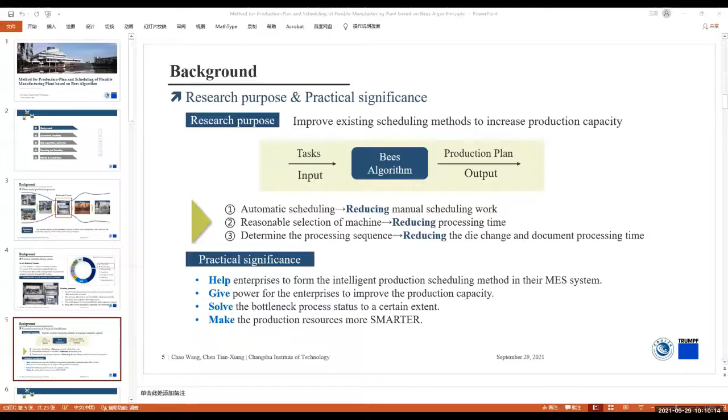Hello everyone, I'm Chao Wang from Changshu Institute of Technology. I'm going to introduce a production plan study with TRUMPF, a famous bending machine manufacturer. This study established a mathematical model based on the real working environment and compares two kinds of bees algorithms. First, I'm going to introduce the background, then the mathematical modeling and the algorithm part. Finally, a short conclusion. This study starts from last December, cooperated with a factory in China.

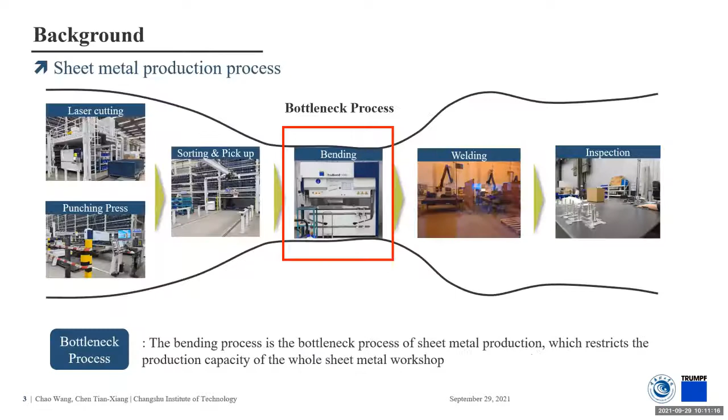As seen from the flow sheet, the bending process plays a vital role in the whole production. It was a bottleneck process and needed to be promoted. The objective of this study was to find an algorithm to help the production plan. Difficulties existed in the mathematical modeling and finding an appropriate algorithm to solve the optimization problem, which has a huge amount of combinations. In the bending process, these flexible manufacturing plants have 4 different bending machines with different series numbers, so they have different capability. The current production plan was assigned manually.

Then they put them into the MES system. So many problems were brought in with this traditional operation procedure. As seen from the moment analysis, processing and die changing occupies more than 60% of the total working time. The file manipulation and the preparing time could also be decreased with appropriate scheduling. The data used in this study comes from real one day's production data, and on that day only 55% of the tasks at one machine were finished.

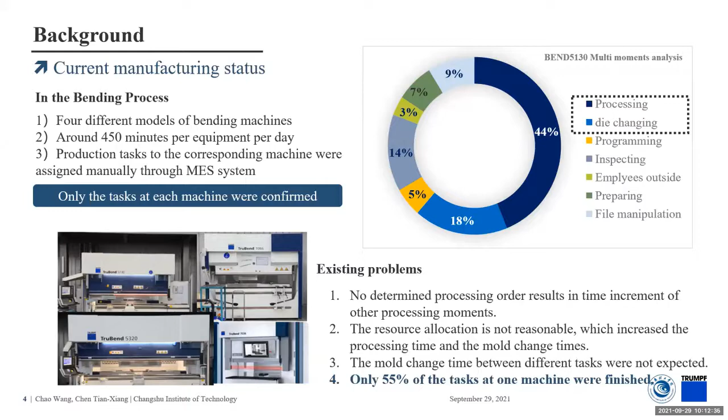In order to increase the production capacity, our purpose was using this algorithm to have a smarter production plan. In the future, we also plan to help flexible manufacturing factories like TRUMPF use this intelligent production scheduling method in their MES system.

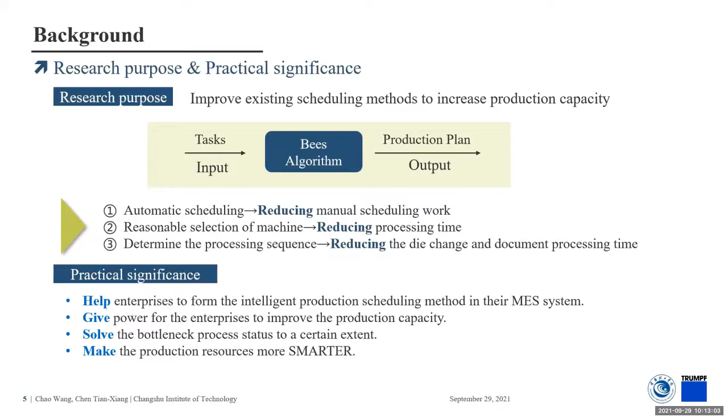In this study, the mathematical modeling was tough to establish. Many conditions were significant enough to be concerned. As the plant has different kinds of machines, a variety of work pieces face a machine selection problem, depending on the machine type, processing time, and the limitation of 450 minutes working time per day. Also, the number of work pieces is less and more varied. They require different dies, including upper die and lower die, and considering the die change time, plenty of time could be saved.

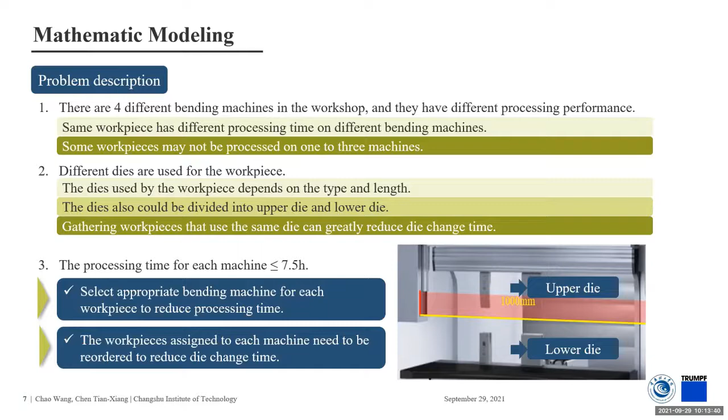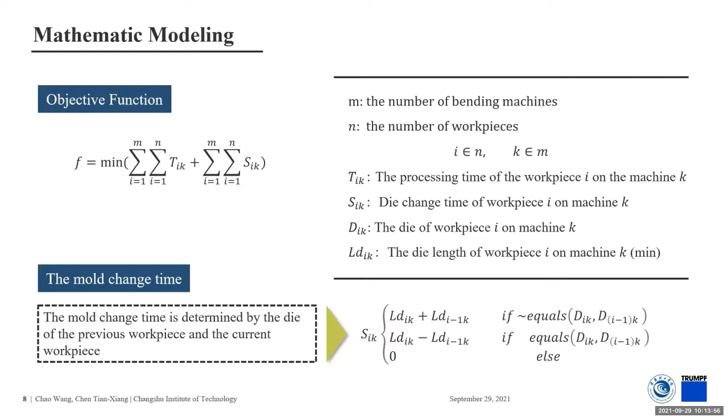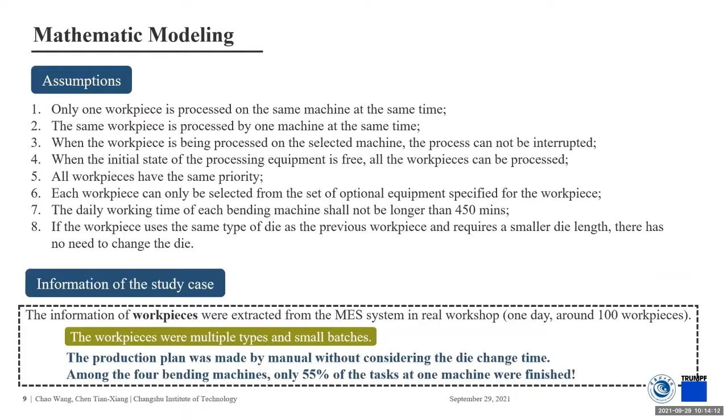As the work pieces were assigned to 4 machines, we focus on the machine with the longest working time, including processing time and die change time. For the die change time, it was determined by the die of the previous and the current work pieces with rules. In the mathematical modeling, many assumptions were made corresponding to the real situation, and you can find more assumptions and their details in the coming chapter.

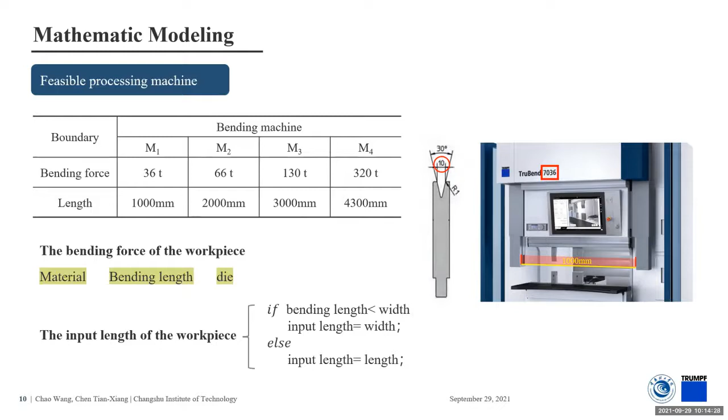Here was the method for work pieces to select the feasible processing machine. It depends on the bending force and the length. The calculation of bending force was the same as the current database of TRUMPF factory.

2 different bees algorithms were performed in this study. The first one comes from the basic bees algorithm. Elite sites and base sites carry out the local searching with different numbers of bees. Due to the large number of combinations, the solution was very unstable.

At there, we also found the number of attempt times for great sites was hard to confirm, as new sites were hard to come inside, as their solutions were worse than the sites after many attempts, although they may have potential faster solutions.

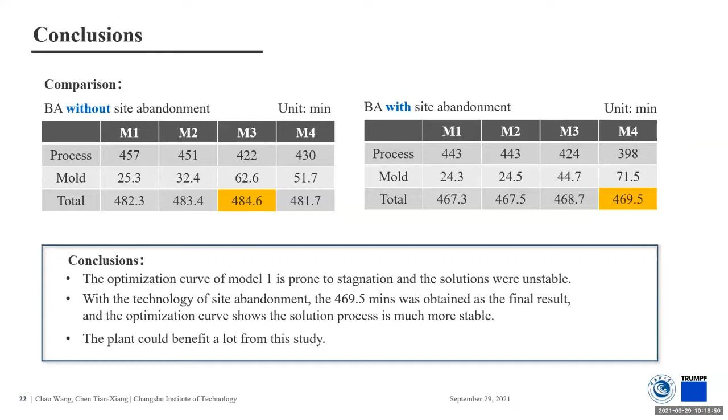469.5 minutes was obtained as a result in this study. This result comes from many boundaries with respect to the real working conditions of the flexible manufacturing plant. The plant could benefit from this study not only through the optimization, but also through the rules we set for the operation sequence and other workers, to help reduce manual work.

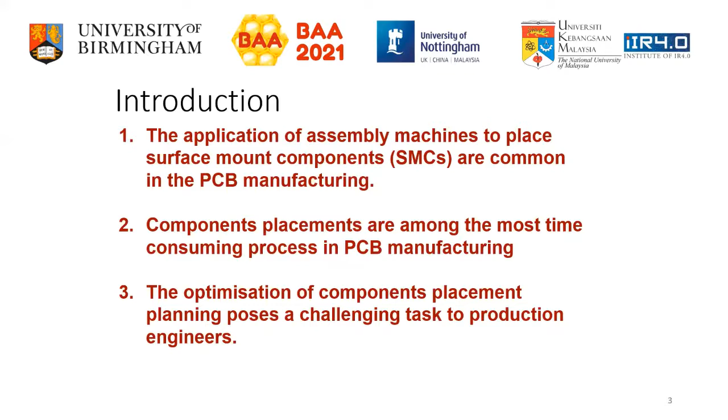In this work, we will focus on PCB assembly systems with MBTD characteristic. PCB assembly system with moving board with time delay, MBTD configuration, is the most complex assembly machine. This is because it requires the synchronization of three mechanisms in the assembly: the feeder system, the multi-head turret pick-and-place system, and the XY assembly table.

During assembly, these mechanisms move at the same time. The synchronization involves complex coordination of the feeder movement from one point to another to provide the correct component for the multi-head turret system, the XY table that moves to the placement position, and the multi-head turret that rotates to a position to pick up a component and place another component at the correct placement position at the same time.

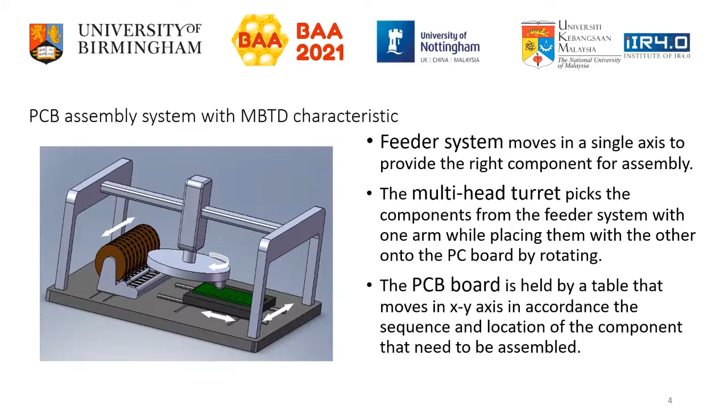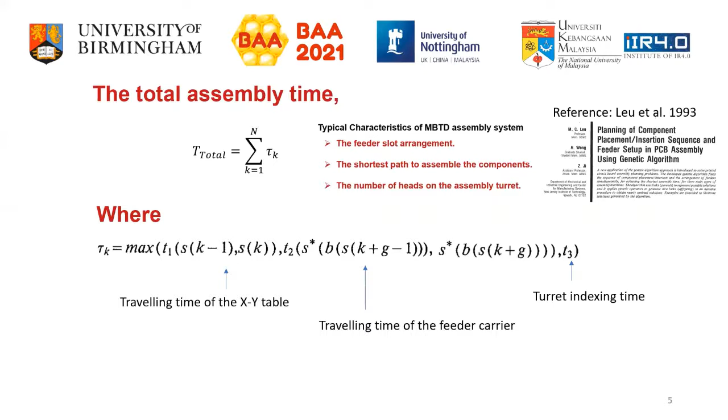The three important times to be considered are the traveling time of the XY table, the traveling time of the feeder carrier, and the turret indexing time. Among the three timings, the longest of the three is the time needed in the assembly of each component. The movement of the two faster parts among the feeder carrier, the XY assembly table, and the turret need to wait until the slowest movement has been completed.

TRIZ is an abbreviation from the Russian language. The translation is the theory of inventive problem solving. It was created by Genrich Altshuller, a Russian engineer who studied inventions from many resources, including patents. He looked for any similarity between different inventions. Altshuller found that there are 40 inventive principles, and most inventions follow at least one of the 40 inventive principles. In other words, these 40 inventive principles can be used to boost our creativity.

We have used only 3 inventive principles from the 40 inventive principles to create the TRIZ-Inspired Operators. Not all 40 inventive principles were used.

There are three inventive principles being used in the TRIZ-Inspired Operators: dynamization, segmentation, and local quality. Dynamization is to allow the characteristics of an object, the external environment, or a process to change to find an optimal operating condition, making it more flexible, movable, or adaptive. Segmentation is about dividing an object into independent parts or groups. Local quality is about making each part of an object fulfill a different or complementary useful function.

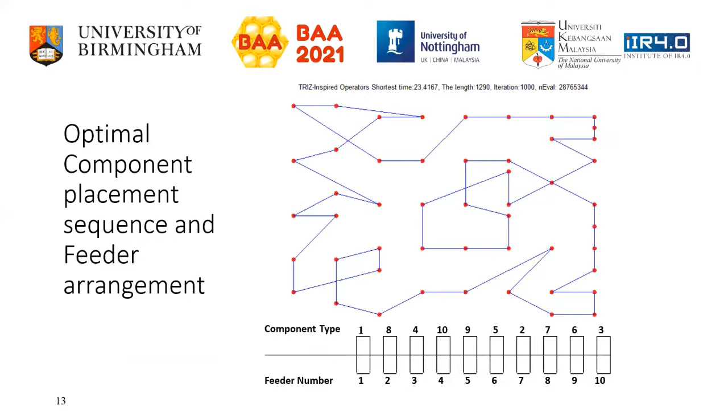Conclusions: TRIZ-Inspired operators have helped to find the optimal timing. They have met the ultimate requirement of the problem, that is to minimize the PCB assembly time. Although it is a very small improvement, due to the large production volumes of PCB assembly in electronic industries, a minor reduction in cycle time will actually save significant production time.

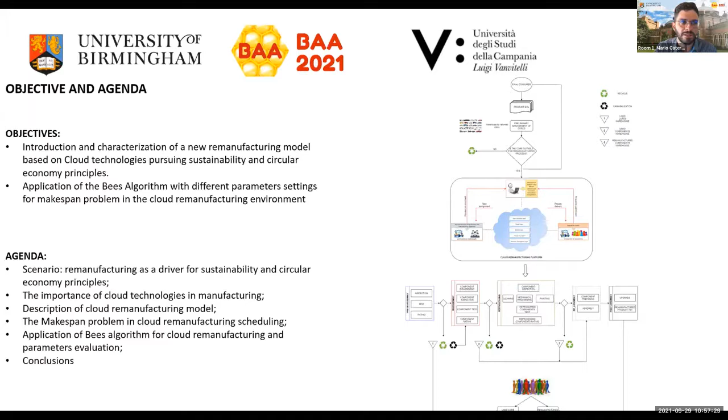The presentation will be organized as follows. Firstly, remanufacturing as a driver for sustainability and circular economy will be introduced. Then the importance of using cloud technologies in manufacturing will be highlighted, and the cloud remanufacturing model will be described. Finally, we will use the Bees Algorithm to test the scheduling phase of the model, and results will be evaluated.

The British standard defines remanufacturing as the series of steps needed to transform an old product into one that can be considered as new, having at least the same performance and the same warranty as a new product. From this definition, it is clear that the remanufacturing process perfectly fits circular economy principles, which aim at erasing the concept of end of life for products.

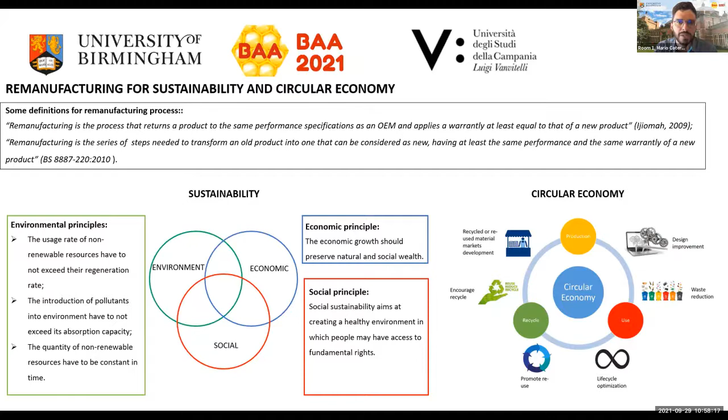Also, two sustainability pillars are achieved, the environmental and the economic one, since remanufacturing allows avoiding new production and ensures economic growth by preserving natural and social wealth.

Today, we are in the era of Industry 4.0, which is leading to the development of new technologies. Cloud technologies are among the most important, aiming at transforming resources and capabilities into services which can be shared all across the world and can be remotely managed in an intelligent and unified way.

Usually, the cloud structures have three types of users. The cloud service providers, who share their resources and capabilities in order to have profits. The cloud service customers, who request the use on demand of such resources and capabilities by paying a fee. And the cloud service brokers, who are the managers of the cloud platform, managing also the interactions between the providers and customers.

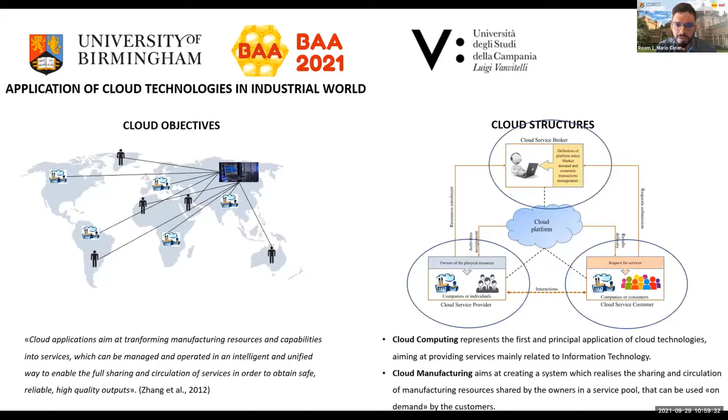The introduction of cloud technologies in manufacturing is not actually new. In fact, it was introduced by Zhang in 2012 with the concept of cloud manufacturing. And relying on that, we developed our cloud remanufacturing model. In this slide, the framework of the model is shown.

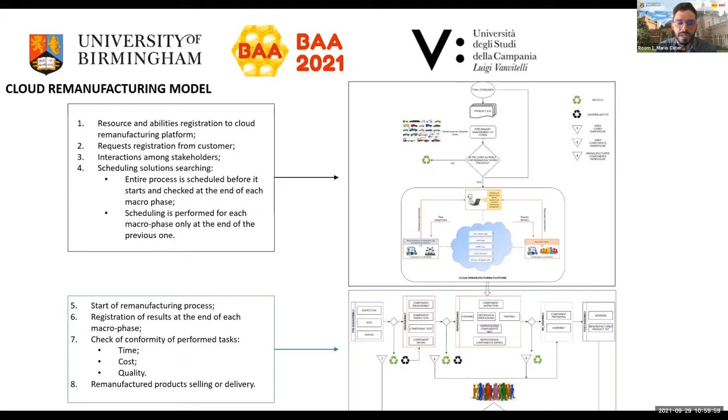It is mainly divided into two parts. The first one concerns the management of requests by the customers and the scheduling process. The second one concerns the management of the real remanufacturing process.

In order to realize a model like cloud remanufacturing, some important features are needed. For example, technologies like cloud computing to create a service-oriented architecture, or tools for resource virtualization, or Internet of Things in order to have real-time data on the resource, as well as a cybersecurity system that should be implemented in order to guarantee the data security of providers and customers.

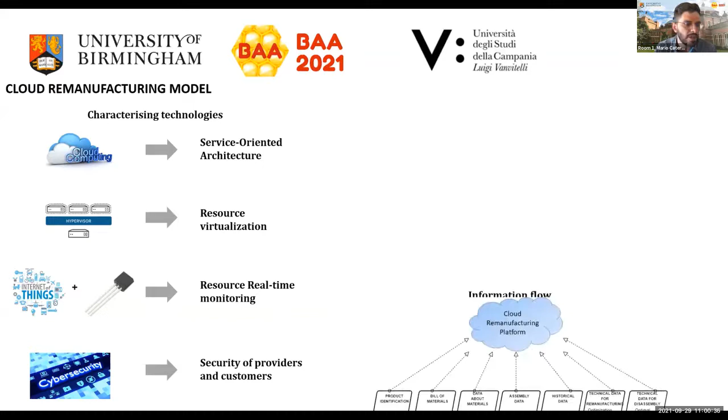Also, the correct information about the product, like the materials used, the assembly and disassembly data, or other technical data, should be correctly addressed after the scheduling process in order to avoid an information overload to the providers.

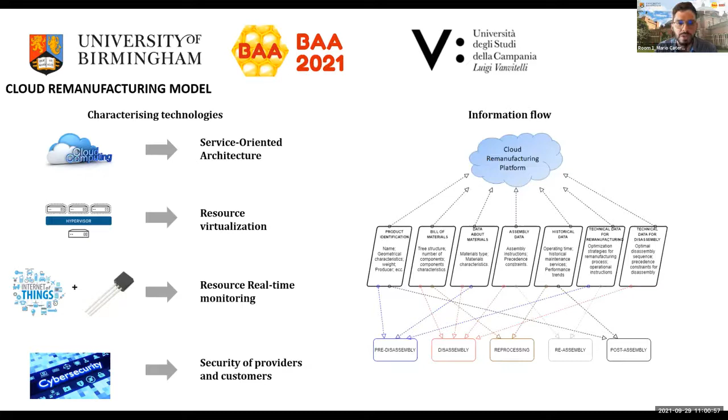Obviously, the main objective of customers concerns time and cost minimization when they want to remanufacture their products. So the model must take into account these aspects.

In this slide, for example, we define the total time for completing the remanufacturing process in a cloud remanufacturing environment. It depends mainly on the activity completion time, which is made up of a processing time, a logistic time, and a waiting time. The waiting time is the time a job has to wait because a resource can be busy with other jobs, while the logistic time is also very important in a model like cloud remanufacturing, since transportation may be needed to transfer cores or components from one provider to another.

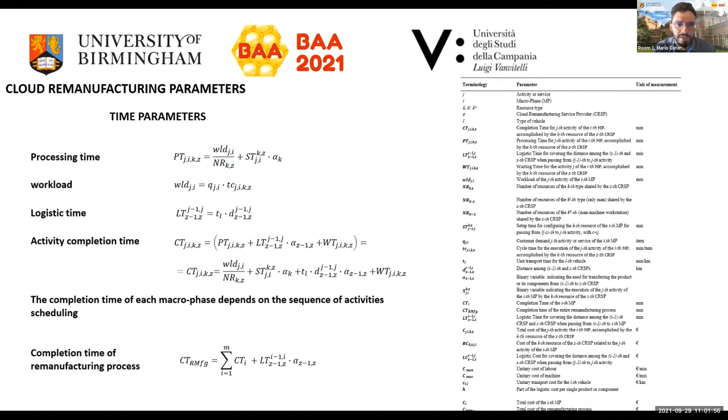So following the same line of reasoning, we also developed the relationships for determining the total cost for the remanufacturing process.

In this context, we want to analyze the make-span optimization problem in cloud remanufacturing. The make-span optimization problem consists in assigning and scheduling activities having as objective the minimization of the total time for completing the process.

So in the hypothesis that each resource can perform only one activity at a time, an activity can be carried out by several resources, but it can only be processed by one. Once an activity is started, it cannot be interrupted until the end. We developed the mathematical functions, the objective function, and the related constraints of the model.

And we used the Bees Algorithm for a test case concerning the maintenance phase, the maintenance macro phase of the remanufacturing process, which in our case study is made up of 26 activities that can be assigned and scheduled to 30 different cloud service providers. We used a full factorial plan of experiments to test the Bees Algorithm with different parameters.

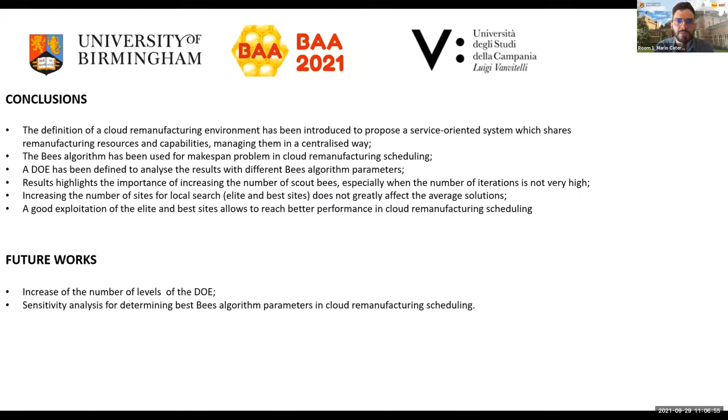For future works, we would like to increase the number of levels of the design of experiment, and also propose a sensitivity analysis for determining the best Bees Algorithm parameters in cloud remanufacturing scheduling. Okay, thank you for your attention.

Mario, thank you so much, Professor Pham, for organizing this event. Maybe, like you say, this is the second event, but the first one was a virtual event. Mario, thank you for organizing and hosting this interesting session.

You are one of my co-authors of the paper. My paper is about the clustered Bees Algorithm for the advanced scheduling in an additive manufacturing context. It was realized in cooperation between three universities.

The first one was University of Basilicata. I came from Italy, and my university is situated in the south part of Italy, in the middle between the south and west coast. It's just some marketing opportunity.

But there are two other universities: Second University of Napoli, where my colleagues Mario and Marcello Fera came from, and University of Salerno, where Professor Lambiase is coming from.

What about the context of this presentation? As I suppose all the people in this room are really experts in the application of this algorithm, I will try to focus on the context of analysis. The major part of this presentation is about the additive manufacturing perspective.

So the first part of the presentation will explain the context of additive manufacturing and the motivation of the work. Then I will present the approach, which is generally divided into three parts: the first related to customer requirements, the second to product requirements, and the third to process requirements.

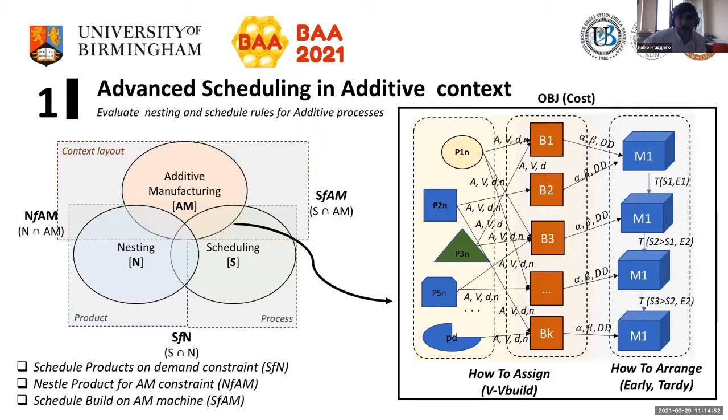Just to say why we decided to focus on additive: additive is maybe one of the pillars of industry 4.0. It is a kind of technology for technology revolution. Today we are thinking about industry 5.0, but additive is one of the pillars of 4.

From my perspective, I am not a technology engineer, but a mechanical engineer, currently working and teaching as an industrial engineer. Additive manufacturing is a kind of revolution in the field of supply chain, or life cycle assessment, because we are thinking of a project that could reduce the steps from the idea to the end user.

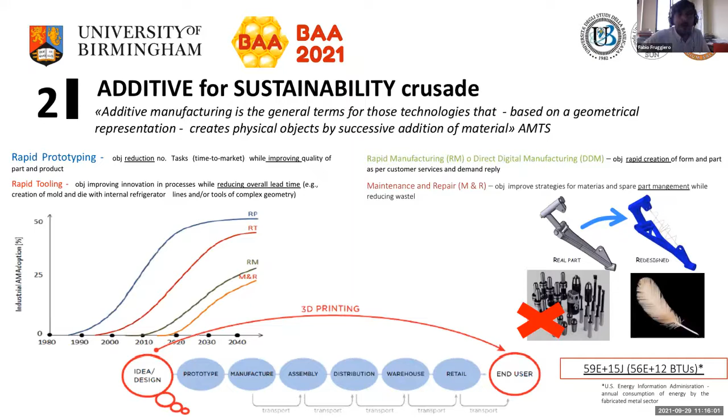In the past, additive manufacturing was considered a prototyping tool. Today it can be applied, as Mario explained in the previous presentation, in the field of spare part management, maintenance and repair, or rapid manufacturing. There is a great concept today about the application of additive manufacturing.

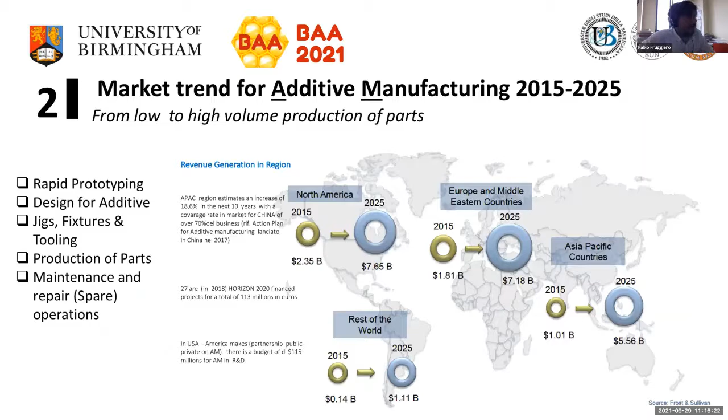This slide explains how we thought of additive in the past, and how we are thinking of additive now. Currently, additive is applied in the field of jigging, fixture, and tooling because it's able to reduce the time to market.

There are different types of processes. During this project, I will focus on a particular type of additive system: a powder bed fusion system. Inside the class of powder bed fusion systems, there are several other processes. We thought that additive manufacturing was one of the applications that can help us reduce the life cycle impact.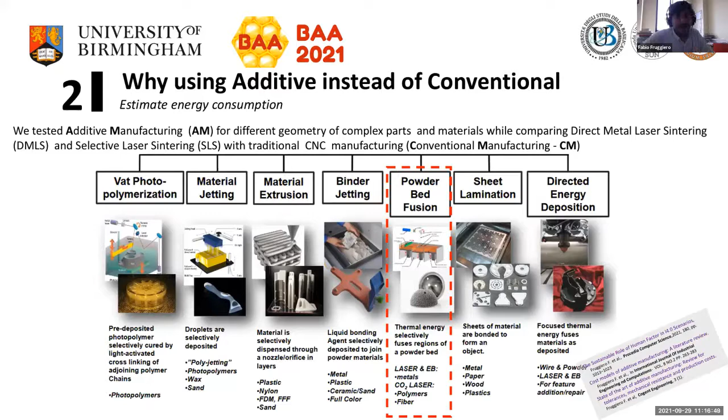There are just a few screenshots about how the supply chain can be reduced or the life cycle can be assessed. So we think additive can help in the field of life cycle assessment and maybe in the field of circular economy.

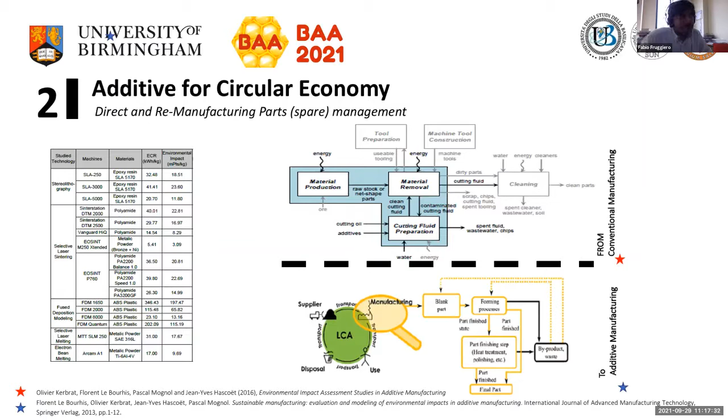We reviewed some publications about this main topic. So going inside the problem, how did I fix my problem? My problem was fixed with two objective functions. I will start from that.

The first one was related to the scheduling perspective, and in particular, the first step means that I will select the type of job I need to perform, or the type of build in this case, that I need to perform according to the customer's requirements.

Generally, the customer's requirements are about when they want the job to be in the hands of the client. So we fixed the first part about scheduling according to the principle of tardiness and earliness, because we are thinking about a project working in a just-in-time approach.

We need to complete the job when the client wants it completed. So there are some constraints and some data. The data are about the type of material I need to perform, the amount of product I need to realize, and the due date the customer is asking me to respect. I want to complete exactly when the due date occurs.

The second objective function is about optimization of the process. In this case, we focused on the type of process performed, the type of material we are working with, the setup cost or setup time we need to arrange, and how much volume inside the production chamber is occupied, because that problem is about removal cost.

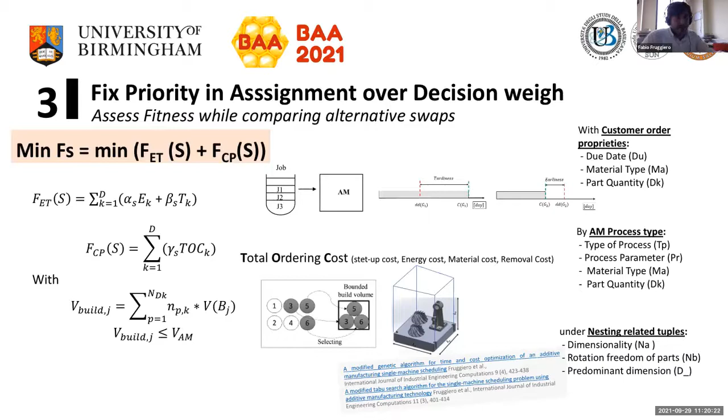So if it can be rotated, or if it cannot be rotated, and if there is a predominant dimension—because this step is more in the field of nesting, or maybe clustering—we analyze the problem in the field of bounded volume optimization. Here are some examples, and there are two publications containing the data that I implemented, along with the comparison algorithm that I decided to check.

I will be fast because there are just 9 minutes. We selected 3 types of material: titanium, aluminum, and stainless steel. We implemented the build budget, and we evaluated how the volume can be respected according to some nesting perspective.

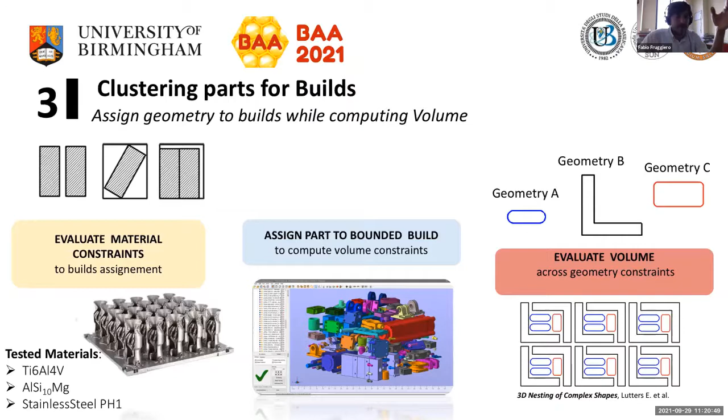The step of nesting was elaborated with 2 steps: the first was a destruction phase, and the second was a construction phase. The destruction phase was realized when we understood that the volume of the chamber was not respected. So we extracted the job, built randomly for the chamber, and deleted some parts inside the job in order to respect the total volume constraints. In the construction phase, we had some parts in the chamber.

In order to implement this nesting perspective, we implemented the Bees algorithm as a separate approach to construct the build for exploration. And in order to improve the exploitation, we included some Tabu rules between the selection parts.

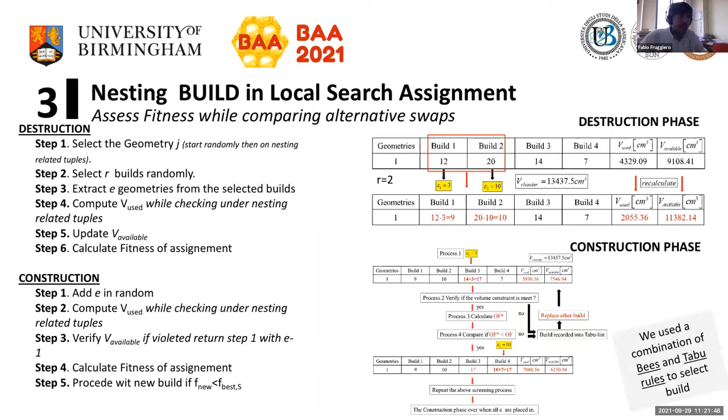After the first part, which was about nesting, we decided to implement the scheduling, and we approached the problem as a single machine earliness-tardiness penalty problem with the addition of a cost amount. As I tested this algorithm and a modification of it, I am presenting you the modification version.

It's what I call the genetic Bees algorithm. It's a kind of Bees algorithm that implements a super Bees able to rewrite the recombination, mutation, and some other genetic function. I call the part where the genetic amount was implemented the jumping function.

Here is a description of how the algorithm works: in the first part there is the tradition of this algorithm, but in the selection part, when we noticed there is a stuck in a local optimum, we implemented the jumping function that moves from crossover mutation to random mutation.

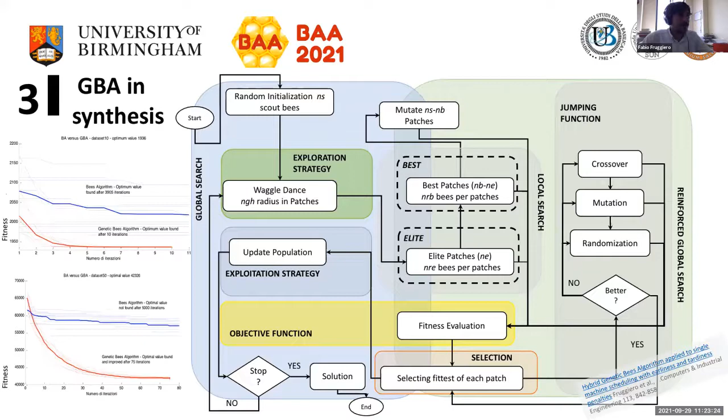We applied the genetic Bees algorithm in the context of analysis, and we made comparisons between pure genetic, tabu search, Bees, and genetic Bees. There are some results relating to the data that you can check inside the paper. We found that the service level—measured as the amount of clients satisfied in relation to the total orders received—was nearly 93%, higher than the other approaches.

We also evaluated the genetic Bees algorithm according to the total cost from the starting solution to the final solution, and we got the best performance at the moment. Our intent is to evaluate if we can improve the genetic Bees algorithm while tuning it appropriately.

So just to conclude, I think that I was really late. My conclusion is about the context of analysis.

A lot of people say that additive manufacturing currently is not a mature manufacturing technology, and it's not measured and cannot be compared in terms of cost with other types of technology like subtractive manufacturing. We thought that the comparison can be done when complex shapes can be performed, but it can be cost effective even when evaluating the total life cycle cost of the project, because additive manufacturing will help us reduce the steps inside supplying, and can help us reduce recycling.

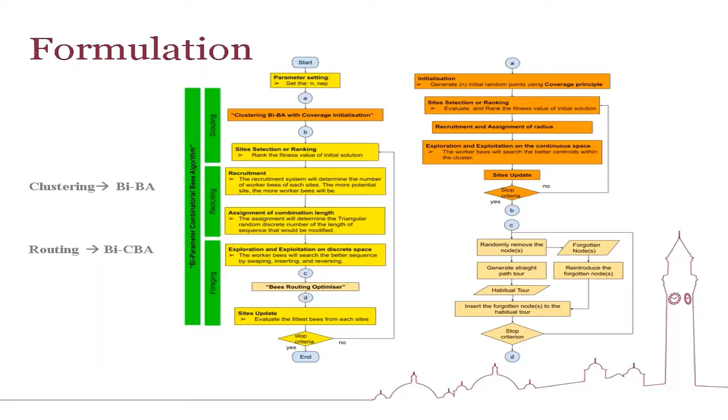The local search of this CBA is using the combination of swap, insert, and reverse with the bees routing optimizer as the intensifier. After setting the parameters on the next step initialization, we use bi-parameter bees algorithm with coverage principle to cluster the customer subjected to the vehicle capacity.

This approach starts from the circular shape initial centroid. The circular shape centroids are formed from random radius of coverage and random starting point angle, or theta. All fitness values with these initial centroids are then evaluated.

This initial circular centroid is then replaced with a better centroid that has the lowest variance and a capacity violation of 0. The movement was accomplished through exploitation and exploration.

After receiving the initial solutions from the clustered customer, the algorithm ranked them all. The recruitment and assignment are determined by this rank. Then, using the triangular random distribution, a combination of searching process is conducted. Finally, the BRO intensifier strengthened the solution by temporarily removing nodes, optimizing the subtour, and reinserting the forgotten nodes.

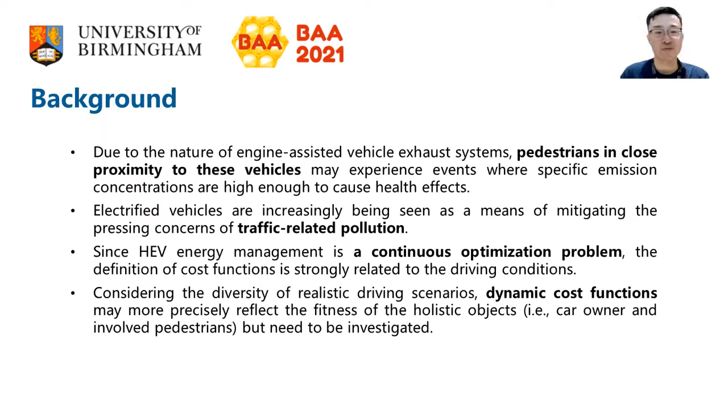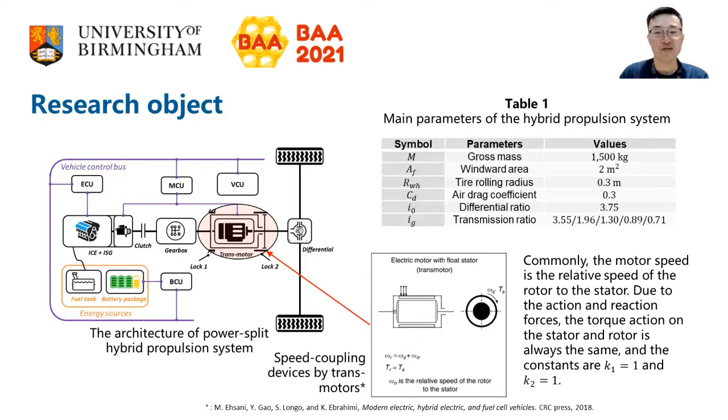The ICE drive and the transmotor's drives are combined in series, so their speeds are added. They can be decomposed via the operation of the clutch and the lock. Main parameters are summarized in Table 1.

In order to minimize pedestrian exposure to vehicle emissions nearby and fuel consumption, the interactive optimization methodology is proposed for the development of the pedestrian-aware supervisory control systems, as illustrated in this figure.

This optimization methodology we proposed combines a novel fuzzy adaptive cost map and the Bees Algorithm to optimize the power split control parameters. The designed procedures include 3 main phases.

The first one is conducting the standardization and aggregation of cost maps of fuel, carbon monoxide, hydrocarbon, and nitrogen oxide.

Number 2 is reasoning the relationship between the pedestrian density and the weights of the cost maps by using fuzzy satisfying approaches. Number 3 is optimizing power split control parameters via BA and the developed fuzzy adaptive cost map.

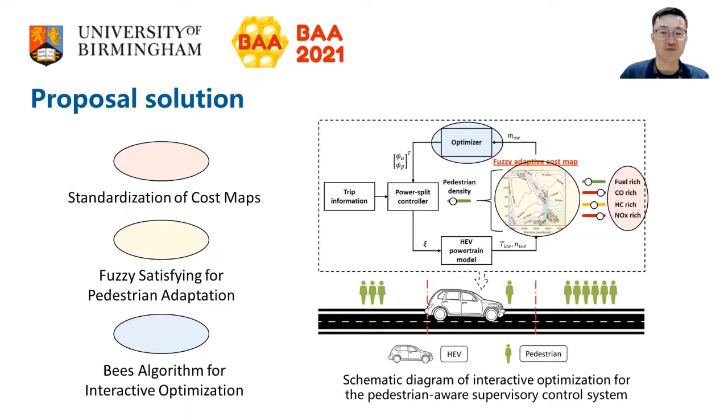First, the standardization and aggregation for exhaust emissions and fuel cost maps of the ICE is carried out in advance to achieve self-adaptation to pedestrian density.

This treatment combines multiple fuel and emission components into a single target for reducing computational burden from the several table lookup operations. Due to different scales of the fuel consumption and emissions map, standardization should be given by using the first equations. After deriving the standardized cost map, the weighting process is done by the following equation.

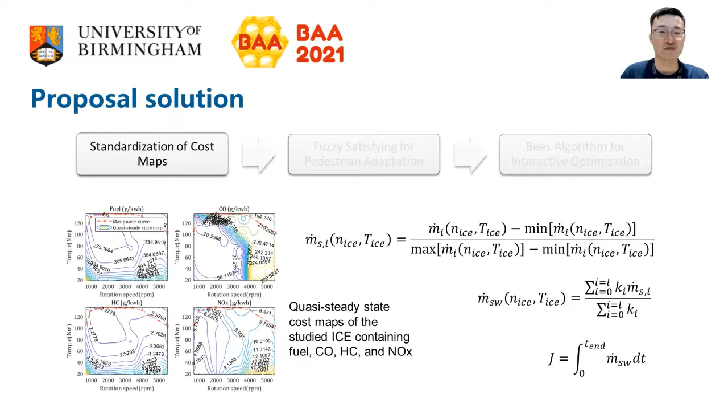The weighting factor K is usually a set of fixed values determined by human expertise. So far, the optimization target is combined by introducing the fuzzy cost map as the last equation.

Then, in order to empower the cost map with an ability to adapt to the density of pedestrians, the relationship between the pedestrian density and the weights of the cost maps needs to be established reasonably.

Considering the imprecise nature of the decision maker's judgment, it is natural to assume that the human decision maker may have fuzzy or imprecise goals for each objective function.

Here, the fuzzy satisfying approach is adopted to interpret the relationship between one input, the pedestrian density, and the four outputs, cost map weights of fuel, CO, HC, and NOx.

Right, experimental setup includes two main processes. One is real-world cycle collection, conducted at Dublin City University. In addition to the general information, the real-time density of pedestrians walking on sidewalks can be effectively estimated by local signals from their mobile phones exchanged with cell towers.

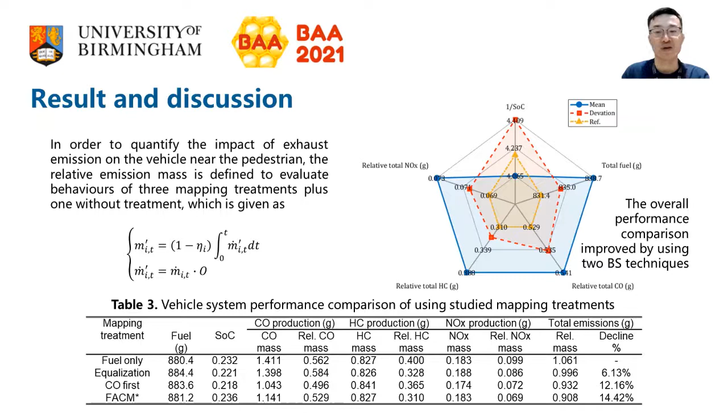One is equalization and another is CO first. This is attributed to self-regulating objective weights of fuel and exhaust emissions based on the real-time signal of pedestrian density during the optimization process.

So at the end, conclusions can be drawn from the investigation. The first point is the developed fuzzy adaptive cost maps can activate the fixed weights of the sub-maps and enable self-regulation of objective weights based on pedestrian density.

Number 2: up to 14.42% mass of exhaust emissions can be reduced for involved pedestrians with the help of the proposed approach, compared to only considering fuel consumption in the mapping treatment.

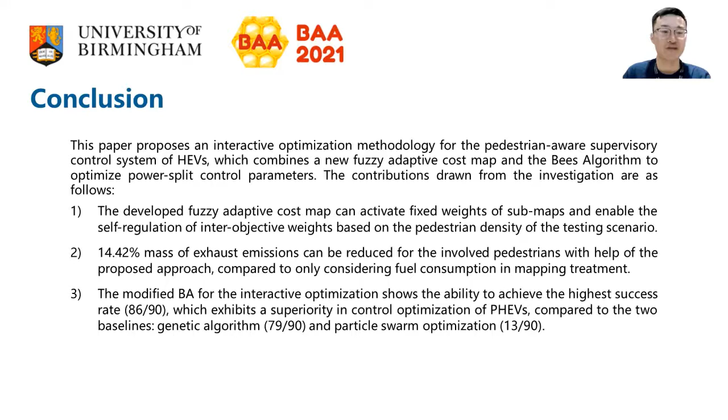The last point is that the modified BA for interactive optimization shows the ability to achieve the highest success rate, which exhibits superiority in control optimization of plug-in hybrid electric vehicles compared to the baseline genetic algorithm and particle swarm optimization.

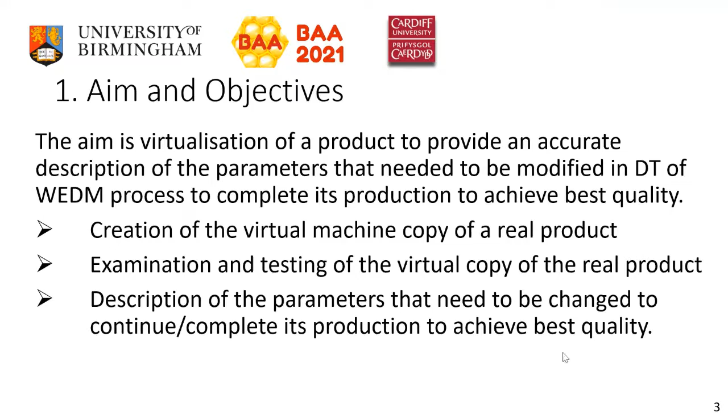In Industry 4.0, we use a cyber world to capture what you have in your physical world, and to emulate your machine in the physical world within the cyber world, so that improvements and scenarios can be run on the virtual machine without causing interruption to the physical world. The connectivity is provided by the Internet of Things.

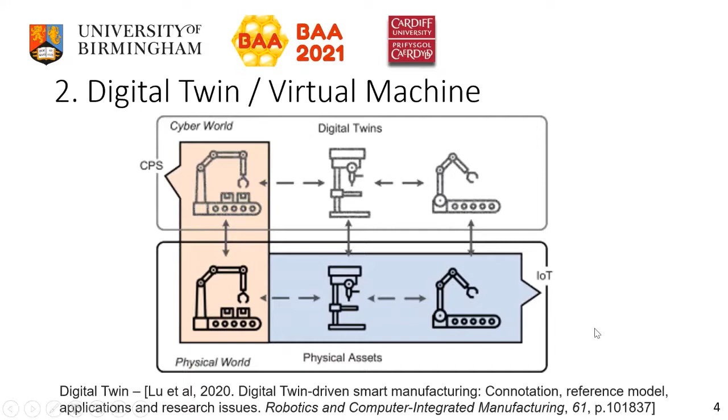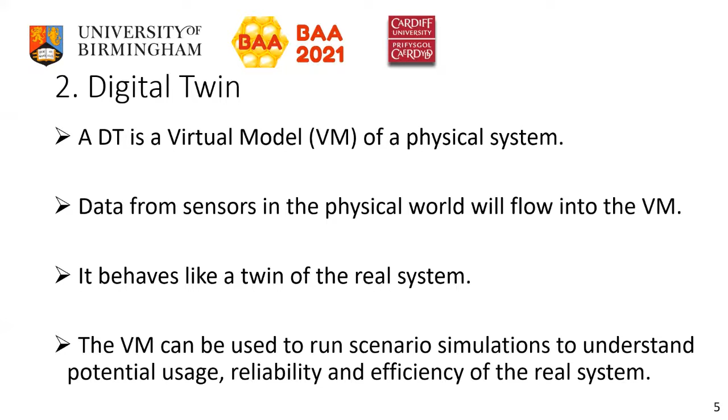So the digital twin is a virtual model of your physical system. Data collected from sensors and IoTs can flow from the physical world into the cyber world, into the virtual machine. The digital twin behaves like a twin for your real system, and your virtual machine can be used to run different scenarios, to emulate your physical system, to make improvements, and study usage patterns, reliability, and efficiency of your real system.

The focus of this study is the wire EDM process, where you have a wire used to machine or cut through a workpiece. It's an electrically conductive workpiece, and you have a dielectric fluid used to submerge the workpiece. When current is passed through the wire, sparks are created, and the energy from that spark erodes and cuts through the workpiece.

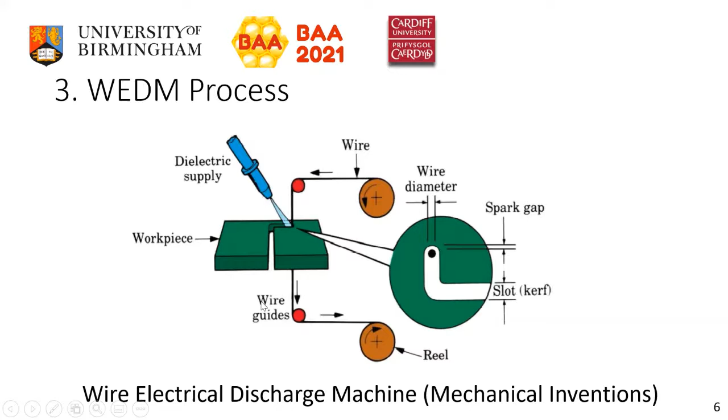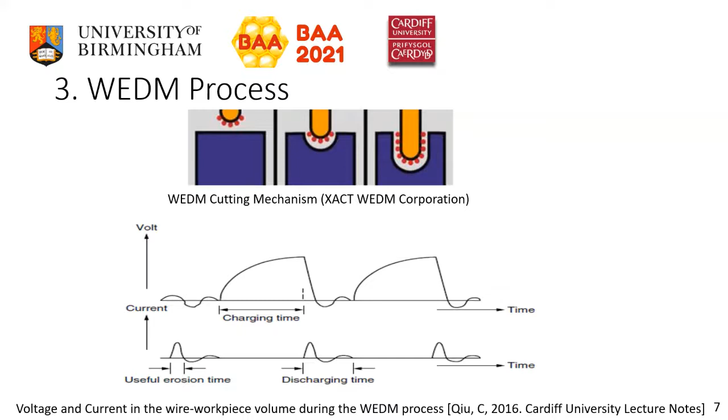The process is shown here: when current is passed through the wire, there's a buildup of voltage, which causes the arc or sparking to take place, resulting in charging and discharging of the electrical field. The wire EDM process is broken down into three areas.

Here you have the optimizing of the process variables, which is the focus of this study. We will consider the surface roughness, which should be kept as low as possible, and the material removal rate, which should be as maximum as possible. Then you have the width of cut, which is the kerf width. However, we will only focus on surface roughness and material removal rate.

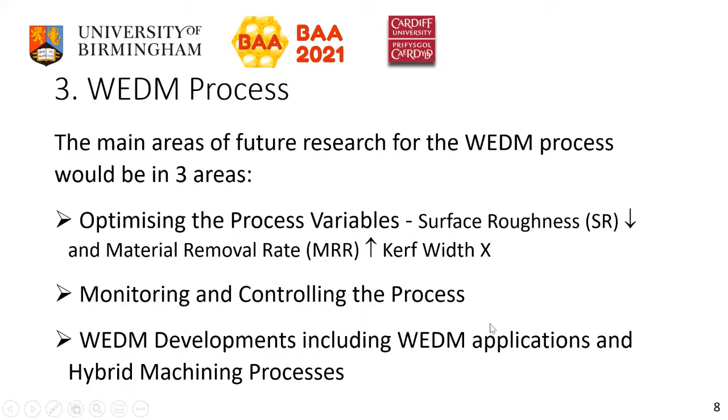The wire EDM process consists of three operations: a rough cutting operation, finishing operation, and surface finishing operation. In this study, we consider the rough cutting operation, where the material removal rate and surface roughness will be the focus.

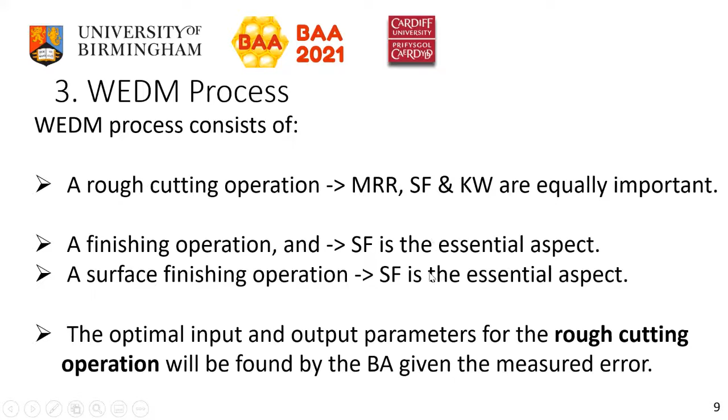The wire EDM process will also be monitored with KPIs through temperature, surface roughness, material removal rate, and a combination of these KPIs, which is called the overall KPI.

If the temperature is in the right range, you set it to 1. If it is outside the range, set it to 0.

Surface roughness can be a linear value, and if the machine is broken, you set it to 0. Generally, smaller is better. For material removal rate, again a linear value.

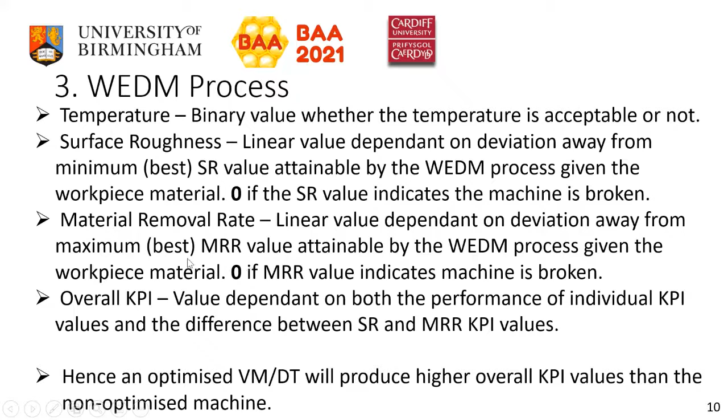Best is maximum, and 0 if the machine is broken.

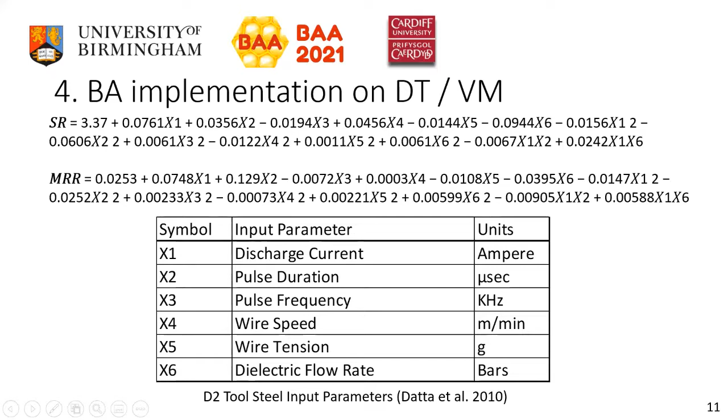If it is steel, this equation has been generated by work done by Datta. Similarly, if the material is different for the workpiece, if it is aluminium, then the input parameters are shown here, 8 input parameters, and these are the equations.

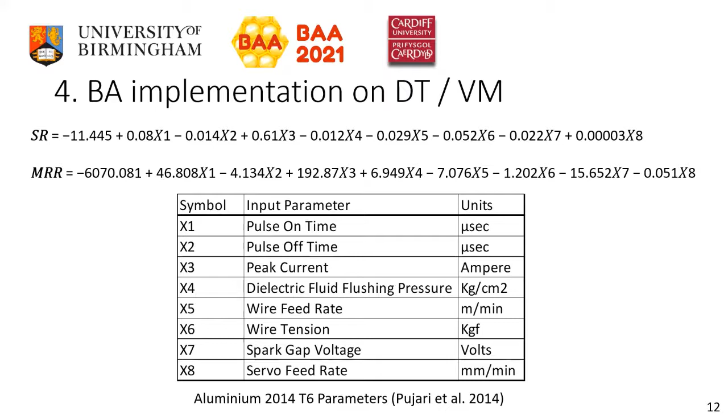These inputs will have a valid range where the input parameters can be monitored. The Bees algorithm used in this study is the standard Bees algorithm, which uses local optimization and global optimization. There are 2 loops.

In the first loop, the Bees algorithm will be used to look at the objective function and optimize the inputs and outputs based on the workpiece material.

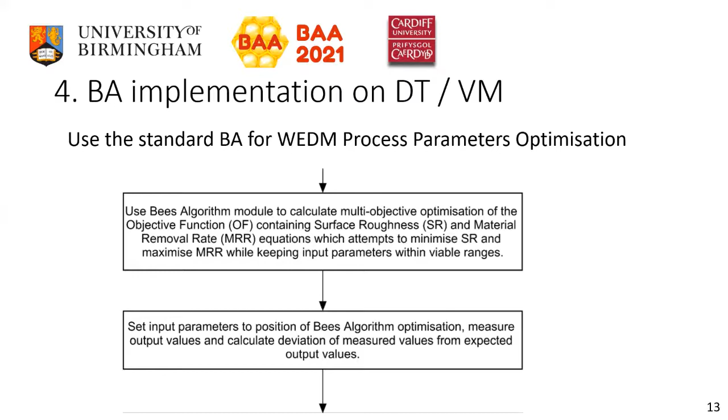Then, using the found optimal inputs, the machine is run, and the error is found between the theoretical value that you estimated and the current value. Then the Bees algorithm is run again to re-optimize the process.

So the theoretical optimum is found using the first loop of the Bees algorithm without taking into account the measured errors.

In the second loop, the machine parameters are set to the theoretical values found, and then the error is compared with the baseline value, and the Bees algorithm will optimize the inputs and outputs in order to find the best parameters.

The theoretical optimum values are found based on the objective functions, and then you run the Bees algorithm and optimize the SR and MRR. Using those values, you find the error for the machine, and then you find the KPIs, SR and MRR.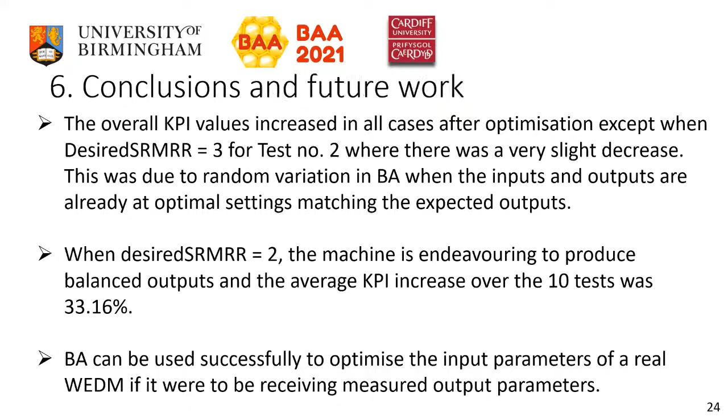So the study has shown that BA can be successfully used to optimize the input parameters for a real wire-EDM process. For future work, more outputs can be considered, like kerf width and time for completion, and more cutting operations can be used as well.